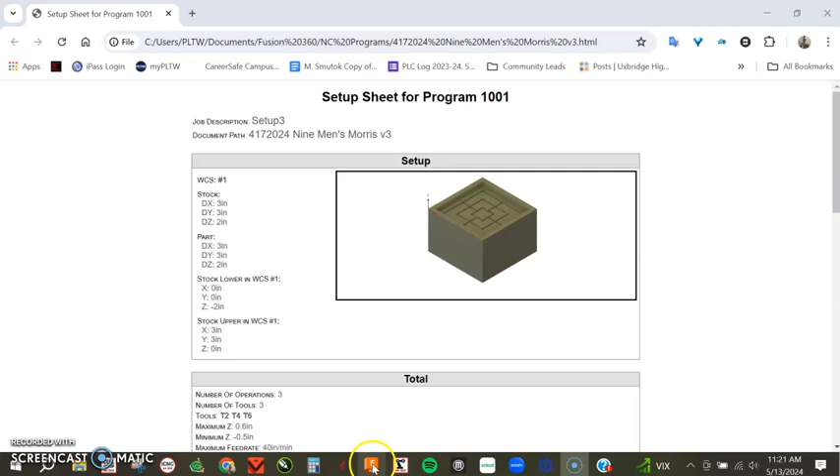And what I did is I took a look at this. I'm by no means a professional machinist. I pretty much learned how to do this by teaching it and breaking a lot of tools and a lot of messed up parts. But here's a little bit about what I tried to do here.

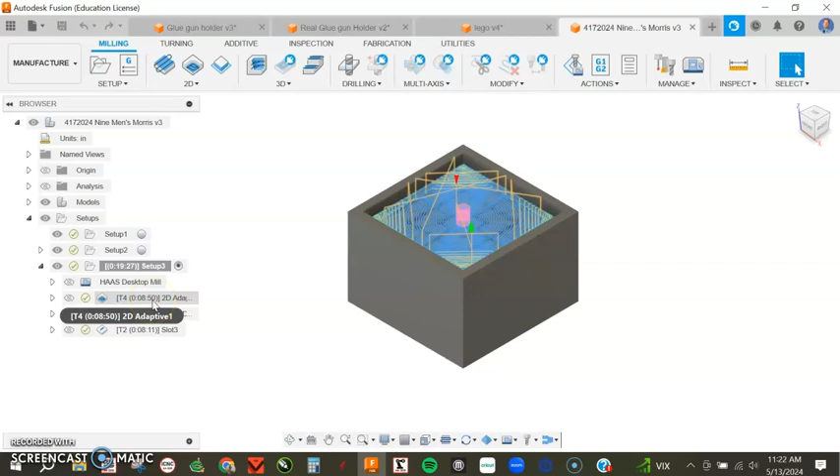So I left your setups and everything in there. I just made my own new one here. Left your Haas mill. First thing I'm doing here as I'm looking at this, I'm looking at a couple of things. First, you've got a pocket that's sort of on top here. Then you've got a series, it looks like a series of holes and then a series of slots in between them. So that's sort of a little bit of how I broke this down, and I can go through it toolpath by toolpath with you.

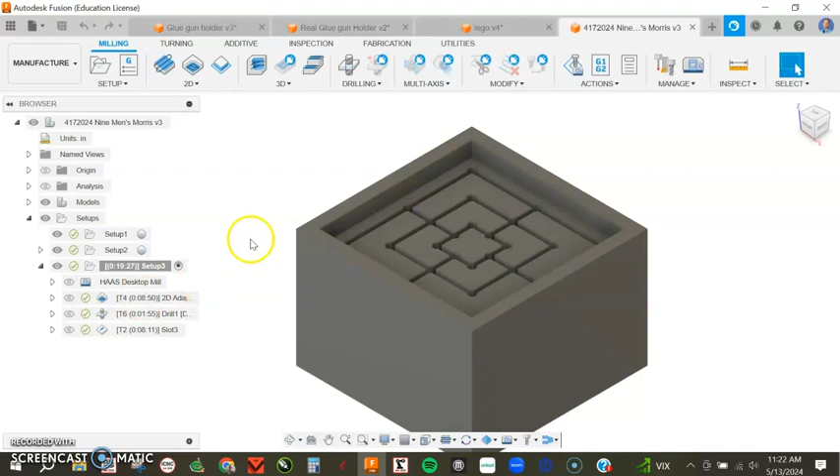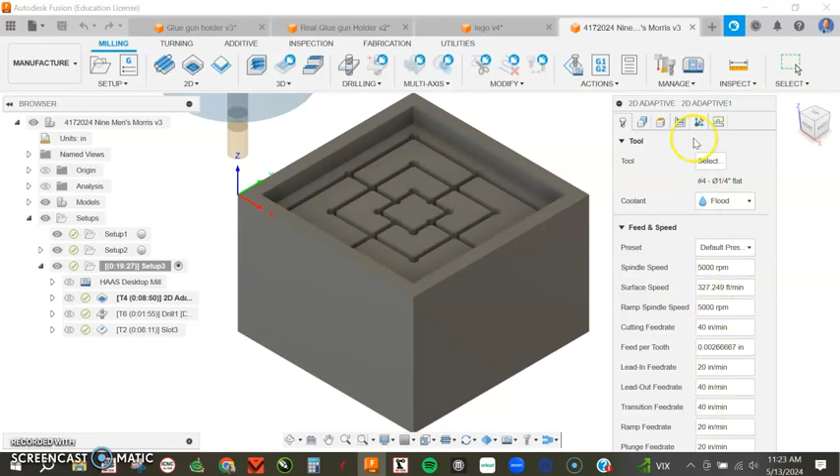So what I have here is my adaptive toolpath with tool number 4, quarter-inch flat. It is not exactly from Project Lead the Way's tool library. You can set up your tool library however you want. Just make sure you have enough flutes on your bit and enough stick out to make sure that you can get down into the areas where you want to machine. So I did not mess with speeds and feeds. I simply messed with the geometry a little bit.

Because it was difficult for me to choose this bottom pocket, I chose this as my pocket selection. And then I came over to my heights tab and I chose my bottom height as that face. So when you're having trouble finding pockets, sometimes that is an option that you can use, is to define the geometry at the top and then choose a different bottom.

I like to use adaptives a lot because they are easier on your tools. With a pocketing toolpath, what you can find is a lot of the tool is engaged in the corner and it breaks tools. I know what machine, I don't know what material you're going to machine this out of. So I left your speeds and feeds and everything alone.

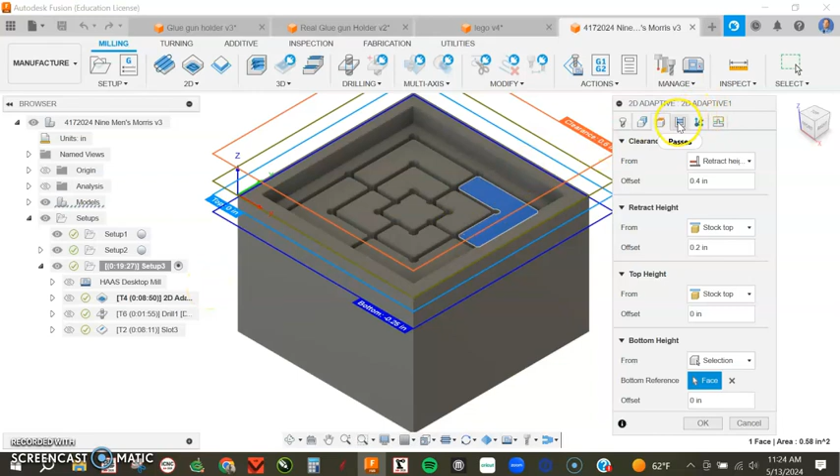As far as passes, I like to use tool diameter times 20%. So my maximum optimal load here is going to be 20% of whatever tool diameter I have. For this application, it's a quarter-inch end mill. For some of the others, they may be larger, they may be smaller. I did use multiple depths because I want to make sure that I don't break anything.

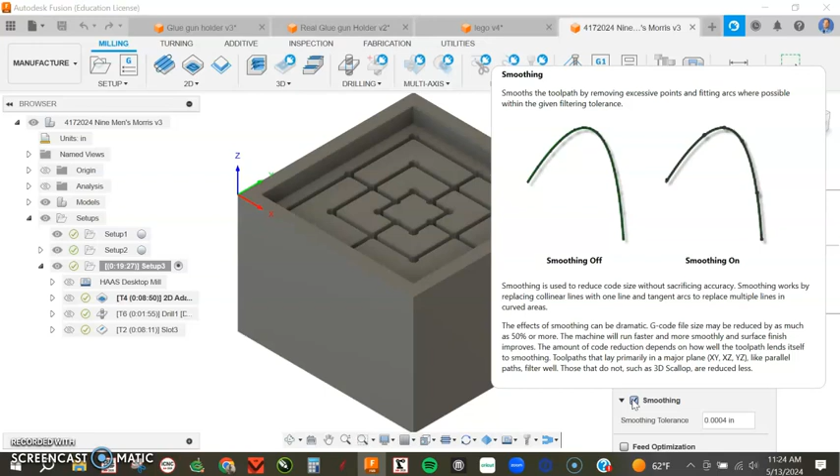I turned on smoothing. It just makes your tool paths a little bit shorter, so your processing time's a little bit less sometimes. And I don't think I messed with linking at all. I just hit OK. And the thing with these strategies is I hit OK multiple times, didn't like what I saw, tried something else. Went back, changed one thing, tried something else.

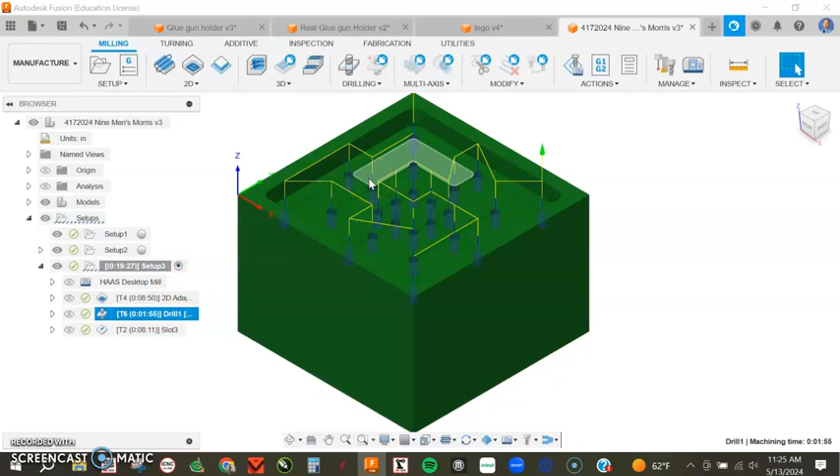Next thing I went through is I noticed you've got all these holes. Well, that's a perfect time to use my drilling operation. These are 1/8 inch diameter holes. I don't know if you want the bottom to be flat or not. That may be an issue. We may have to go back later with a 1/8 inch end mill and just clean up the bottom of the holes or something. But I used a drilling tool path with an 1/8 of an inch drill bit.

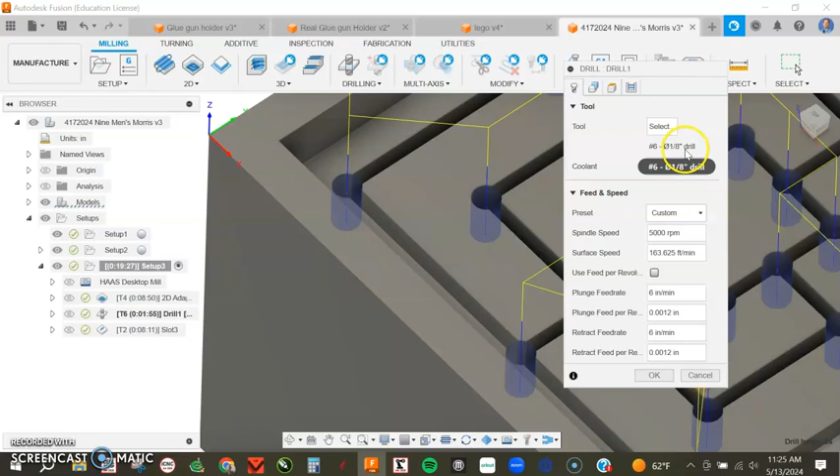Again, I don't know your machine, so I didn't mess with speeds and feeds. For geometry, I selected a hole face, and then I did select same diameter and just picked them all. Heights I left alone, but under cycle here, this is important.

With something that's so small, it's important that you do some sort of pecking or retracting as you go, so that you don't clog up the flutes of the drill bit with whatever material you're machining here. So I chose deep drilling with a pecking depth of 1/16 of an inch. And what that means is this will drill down 1/16 of an inch and then raise itself back up and then go down another 1/16 and raise itself up to kind of clear the chips out.

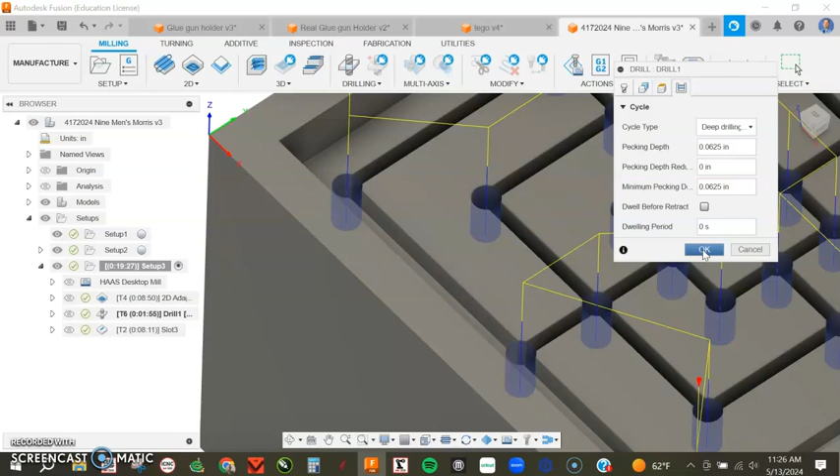Again, I've had pretty good luck with drilling round things first. You get an exact perfect diameter. It's a little bit easier on your end mills when you've got this material removed already, so there's space for chips to go. So there's my drilling toolpath.

And then the last thing here is your really skinny, and I didn't do it to every single slot, I only did it to this one here so far, is I made a tool, 16th inch flat end mill. I made sure that my tool in my tool library is physically long enough to stick out.

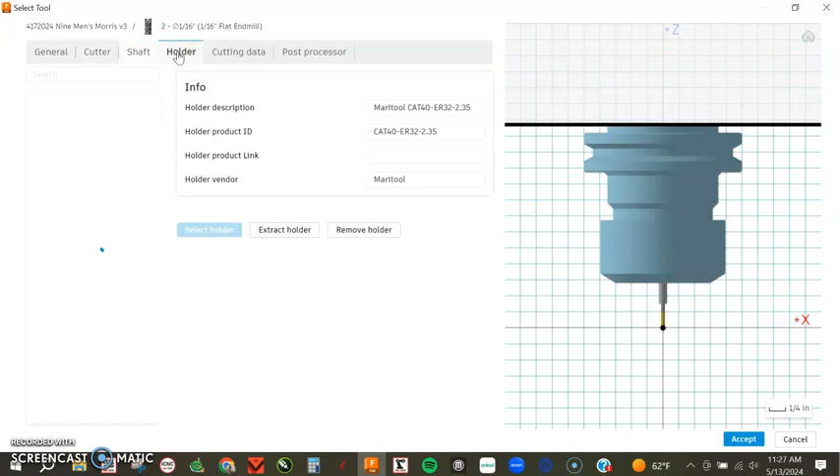I think it's in, nope, it's over here, it's in cutter. I made sure that my length below the holder, which is from where your tool holder is to the bottom of your tool, was sticking out enough that the tool holder wouldn't hit the sides of the part. So I think I may have had to make a little change on there. This is a 16th inch flat end mill.

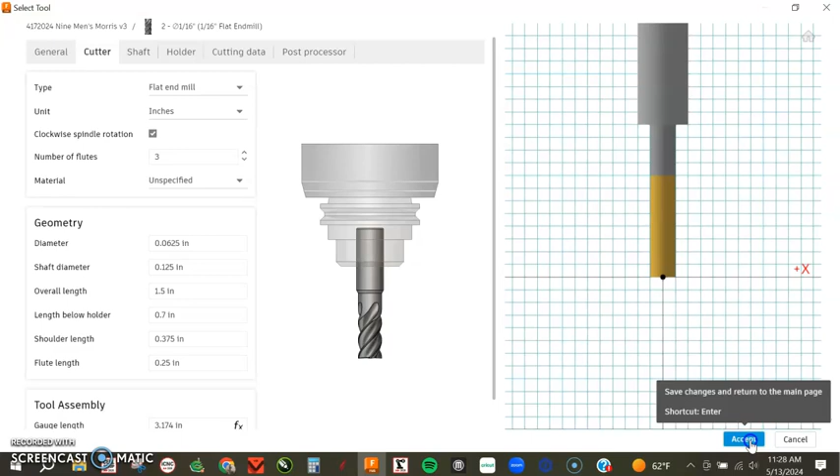My advice is to buy like a dozen of them. Don't buy like one or two because they're going to break. That's just been my experience. Maybe I'm a terrible machinist, and that's okay. I'm learning as I go. So I'll hit accept on that, and my computer will freeze.

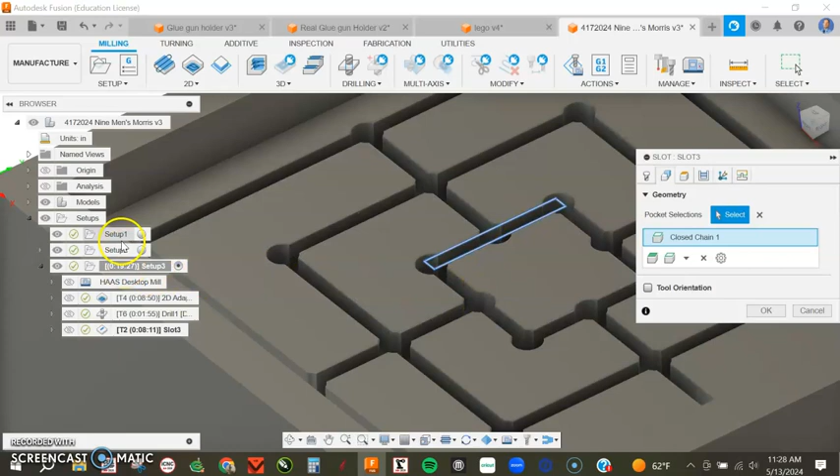Oh, here we go. So I used a slotting toolpath here, 2D slots, and for my geometry, I just chose your pocket selections. And what I had to do to get to that point was I came over here to models, and I turned on this sketch. So I made that sketch visible. So what I can also do is I can come in here and I can select more of them.

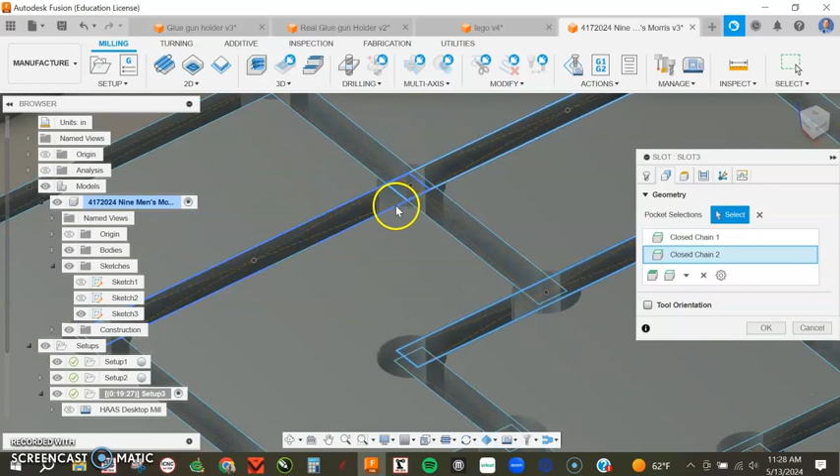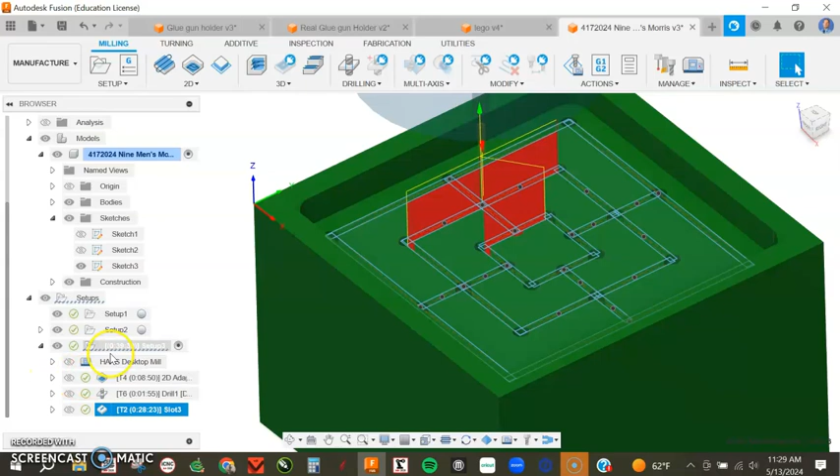And I may have had to go through and mess with my depths as well, just like I showed you previously with this first adaptive for this first big pocket here. So there's my slot. I'm not getting any computing errors here. So let's just take a look, see how the whole thing looks together here. Let me turn this off, and let's see what this looks like.

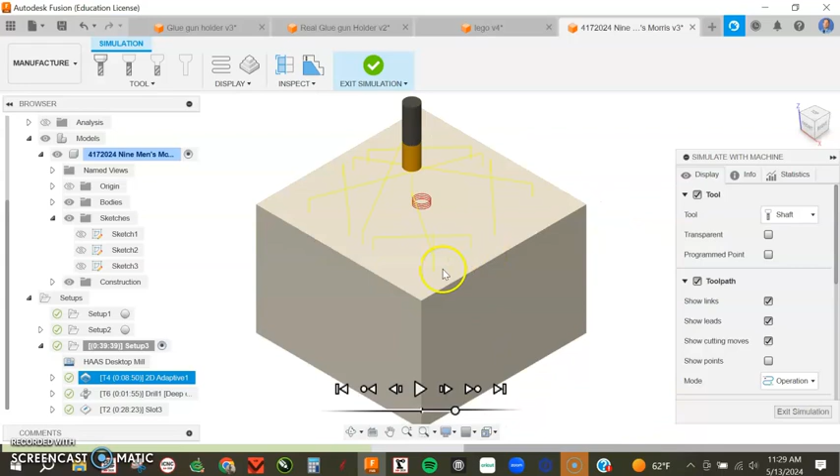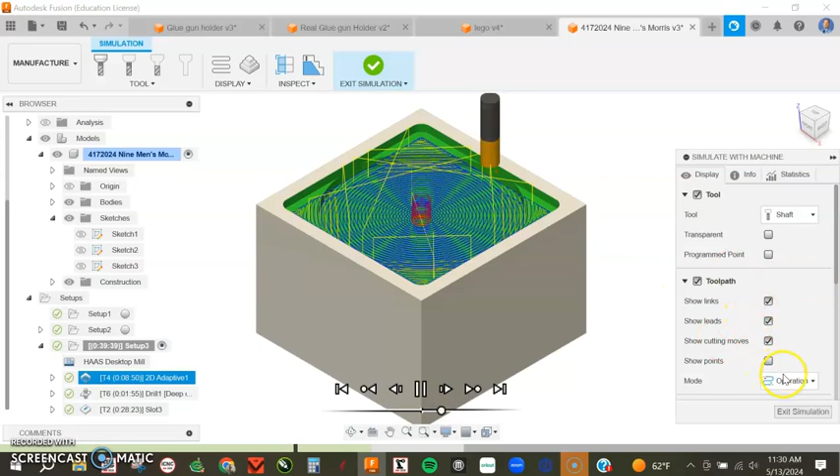Oh, multiple tools programmed without enabling allow multiple tools. That may be a Haas thing. I'm not sure. Not seen that before. So I'll just come here and click tool isometric, and we'll hit play here. So I'm fast forwarding because it's a little bit of a longer toolpath here. It's going to take this out in 2 passes. I can certainly turn my toolpaths kind of off here so we only see a little bit of it.

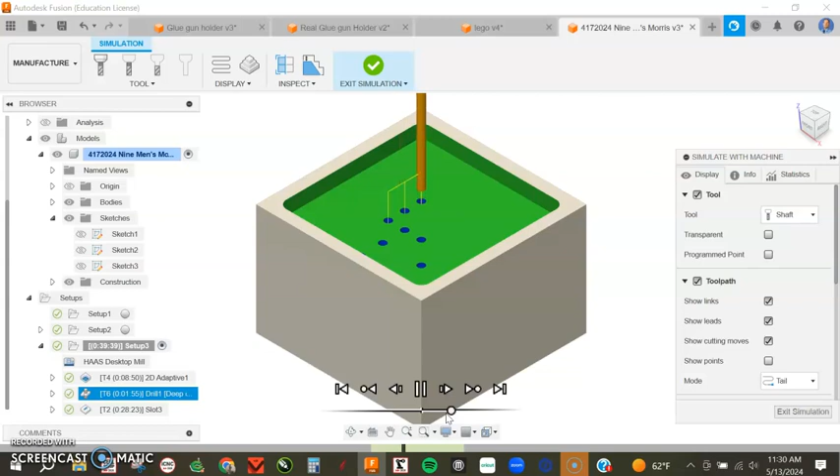And I'll send you this F3D file too, so you can play around with this. There's my drilling. I wanted to slow this down to let you see that it's actually taking little pecks of the holes to clear out the chips. So that's what that does. And then we'll see how it does its slotting. Remember, I had to mess with the tool a little bit to make sure I had clearance in there. So there's the start of it.

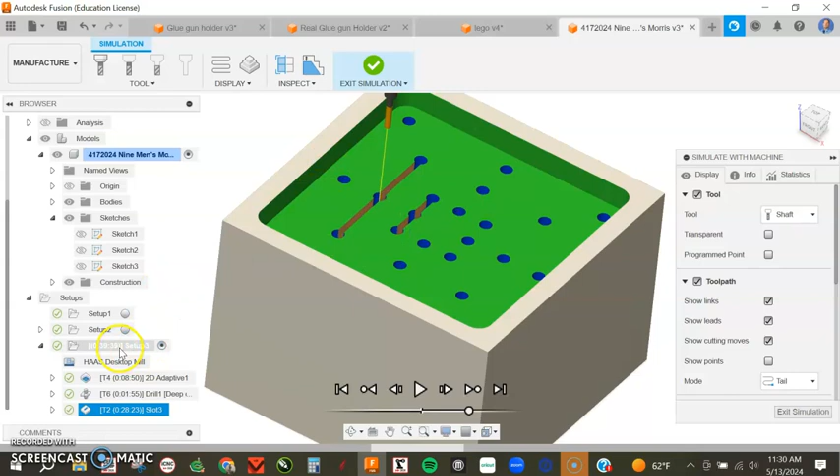I would keep going with this. You're at about 39 minutes as of this point, but that's based on speeds and feeds, which I have no idea about. So good luck, and please reach out and let us see the final product here.